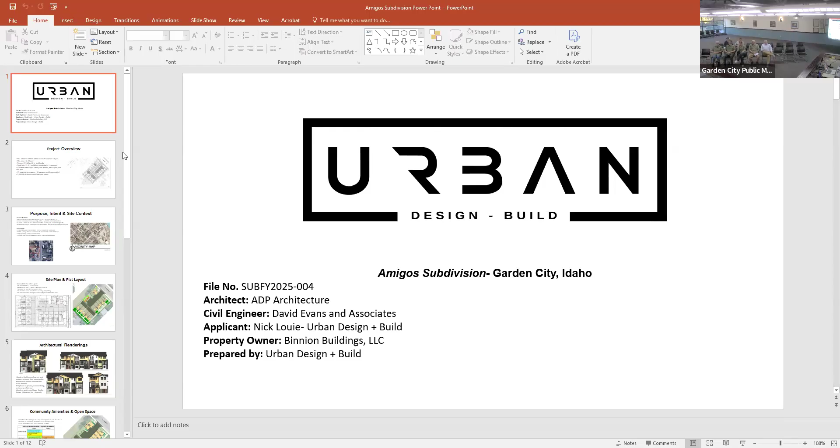To give you a little project overview, this site is located at 3933 and 3921 Adams Street in Garden City. It's plus or minus 0.56 acres of land in the R3 mixed-use residential zoning. We are proposing a 12-lot subdivision, with 11 buildable lots and one common lot. The subdivision will consist of one single-family home, one duplex, one triplex, and one fiveplex. We are proposing 27 total parking spaces, 22 of those interior garage parking and 5 guest stall parking. We are also proposing 3,200 square feet of shared qualified open space throughout the project.

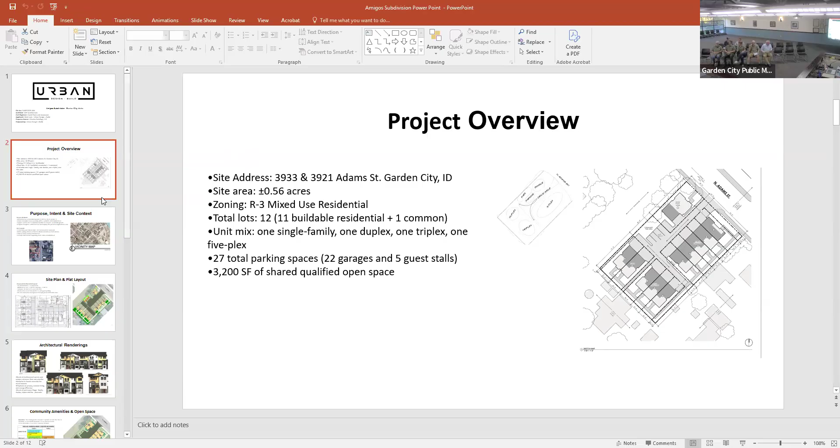So the purpose of this development, we're hoping to redevelop two underutilized parcels located at 3921 and 3933 North Adams. When I became part of the project, it was completely cleared, but I believe there were some old houses or mobile homes on the site at one point. Currently the site's completely clear.

We hope to create attainable home ownership within a walkable infilled neighborhood. By doing a mix of unit types, we can sell to several different classes, hence why we're doing townhomes and single family throughout the project. We hope to support Garden City's comprehensive plan for compact, sustainable growth, and we want to integrate thoughtful architecture and landscaping that preserves neighborhood scale.

The site is located between Chinden Boulevard and the Boise River Greenbelt, right off of Adams. It's walking distance to Veterans Memorial Park and local services and gas stations, really close to the Greenbelt. It's fully served by existing infrastructure on Adams Street, and it's a strategic infill location supporting smart urban redevelopment.

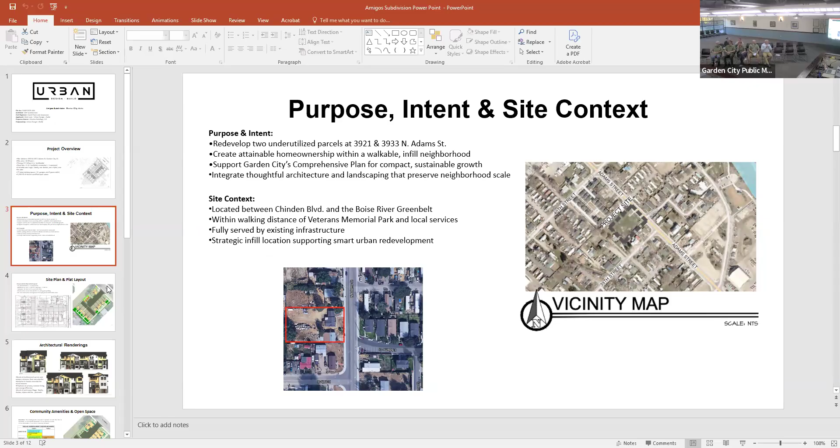I want to share with you the site plan, which is the first sheet I gave you. To recap, it consists of 11 residential lots and 1 common lot. The minimum lot size on our site is 1,350 square feet, and the average lot size is 2,030 square feet. We're abiding by all the setbacks with 20 front, 15 rear, and a 0 to 5 foot side.

We are proposing a private access drive coming off of Adams Street, going into guest parking, and we have a hammerhead for fire turnaround. We are going to contain all the stormwater on site with our stormwater management system and infiltration basins.

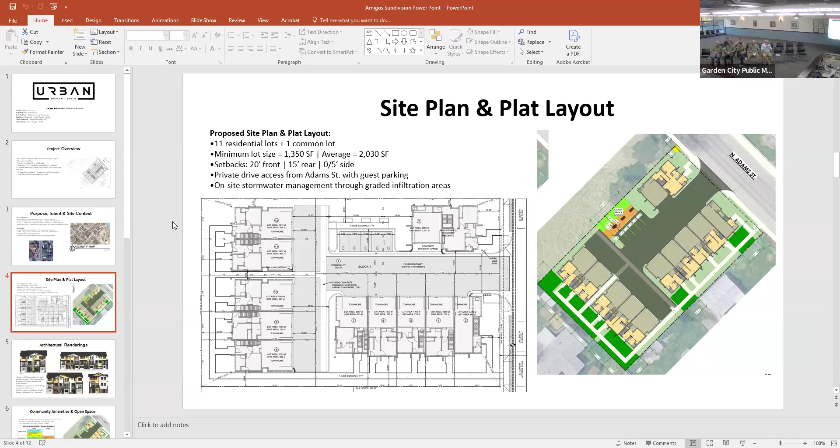So what we did is we changed the colors of the garage doors and front doors for each unit so people could distinguish one from the other. So we now have a blend of architecture, variety, and unique entrances from one another. We have variation in facade materials for visual interest, and we have an emphasis on privacy and outdoor living, and each unit is energy efficient.

We do have a blend of unit types - single family, duplex, triplex, and fiveplex. During our DR meeting, they really encouraged us to look into the code and figure out how not only can we have different unit types, but how we can distinguish them from each other. As a team, we thought different colors throughout, and that's something we wanted to discuss with you guys. We're open to changing colors, but we're willing to work with staff and do whatever it needs to meet code if we didn't already.

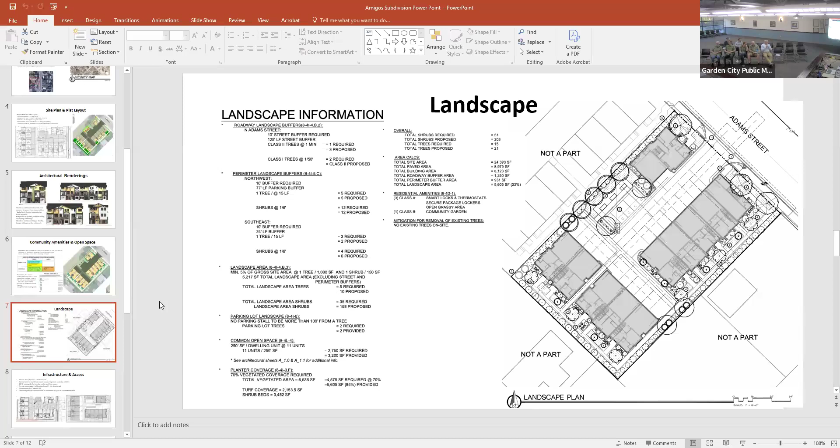Okay, so infrastructure and access: this would be a private drive entered off of North Adams Street, on the south side of Adams Street. We would connect to all municipal water, sewer, irrigation, and dry utilities. We would build the streets to ACHD standards with a turning radius for fire access, or a hammerhead. We met with the fire department and they approved the plan.

We are proposing on-site stormwater infiltration systems, so seepage beds. A small portion of the site, at the bottom here, is in the floodplain. We're advised to build everything above the base flood elevation, which we're proposing to do at 2 feet above BFE, to eliminate insurance issues and any risk in the future.

We are providing pedestrian circulation to all the amenities. That was a recommendation from DR last week. So we added sidewalks throughout the asphalt to get to the community garden and the mailboxes, creating a 360 rotation around the site.

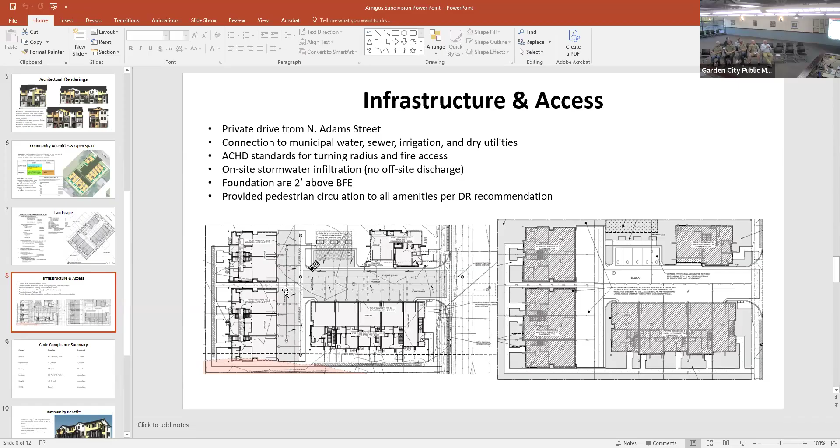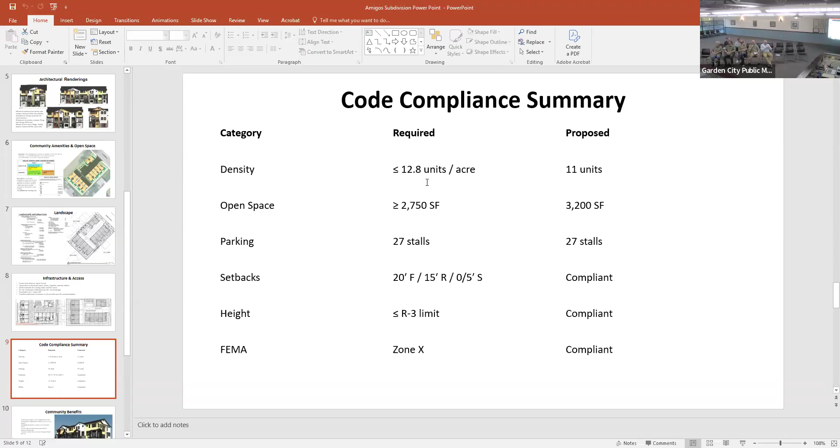To go over the code compliance summary: we comply with all density requirements, proposing 11 units where the site can support 12.8. The minimum open space needed was 2,750 square feet and we're proposing 3,200. We are required to have 27 parking stalls and we're proposing 27. We are compliant with all setbacks, height restrictions, and the floodway or flood zone requirements.

For community benefits: this is an infill project that aligns with the comprehensive plan of Garden City. We believe it will strengthen the neighborhood and diversify housing options and affordability. It's in walkable proximity to services and the Greenbelt, has great streetscape and landscape improvements to enhance the public realm, and expands Garden City's tax base through efficient land use.

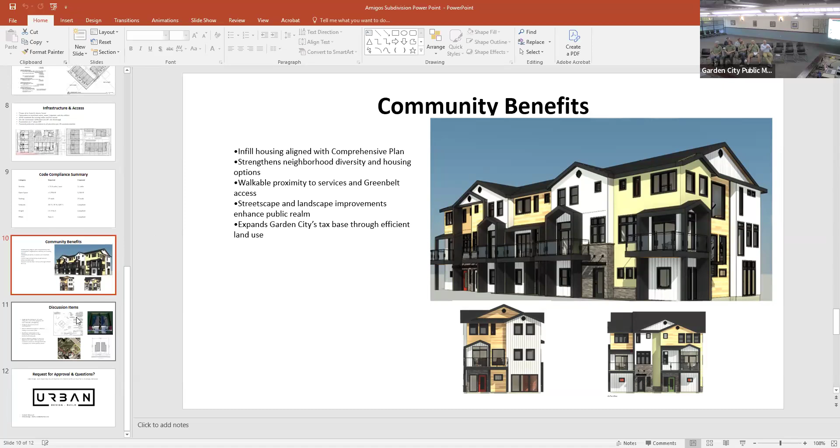One item for discussion, which was in the staff report and part of Hannah's recommendation for approval, is an easement along the south side of the property. The comprehensive plan shows a public easement and walkway, 12 feet wide, on the south side of the property, where this red marker is — a public access easement 12 feet wide along the south, with a 10-foot sidewalk and lighting. The purpose of this easement and walkway is to connect to future developments to the south, east, and west of our development. We had a couple of issues with that and wanted to discuss it with planning and zoning and staff to figure out how to work around this and find a happy medium for everybody.

So we did our due diligence and reached out to the property owner to the east, Damon Dickson, and he had put in a proposal, which are these two houses here.

This is kind of his site plan. He owns these two parcels. He has a project to the east that has an approved lot split for two single family houses. So he has two lots and plans on building two single family houses on those lots.

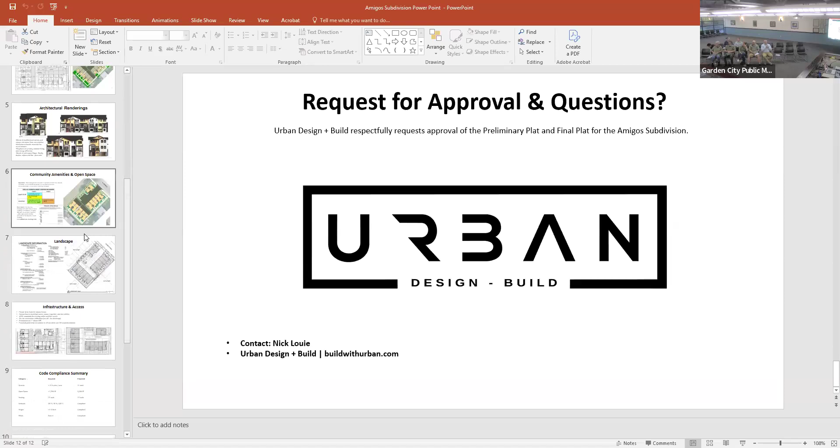Good evening, Chairman and Commissioners. The applicant did a great job summarizing the whole project. I do want to clarify and reiterate that this subdivision and PUD is no longer a PUD, and therefore any of the code waivers mentioned in the staff report are completely voided. I was not able to fully get around to the analysis of the October 6th and 9th resubmittals, but at a quick glance, it does appear like code compliance is being met.

But just in case, I did draft conditions of approval in the decision document to ensure that code compliance is met. With that being said, it is completely within the commission's ability to continue this application to the November hearing to double check and make sure the analysis is correct. That's not what I'm recommending, but it is an option for you to make, because a complete staff report is important.

There are a few items within the staff report that weren't really hit tonight as in depth as I would like to present to you guys. They're mostly interpretation and discussion items.

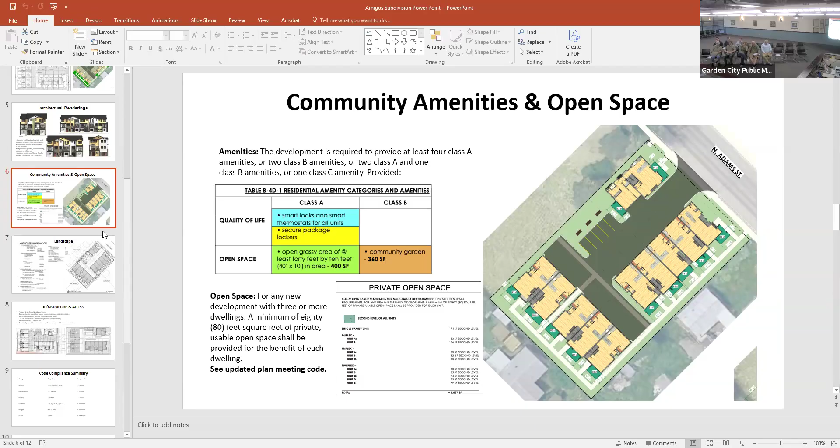Okay, the next item for discussion is the design of the facades. This is generally a design review comment, but given that it's new code, I wanted to bring it to your attention. The code now requires each unit to have some uniqueness, whether through architectural variety, colors, or materials, so people can differentiate between dwelling units. It does allow for paint colors to be different, and I'm not saying what the applicant has proposed isn't adequate. I just wanted to make sure we had this discussion tonight, or it can be sent up to City Council. There's a condition drafted to require coordination with staff, and if not, it can go back to design review for further deliberations.

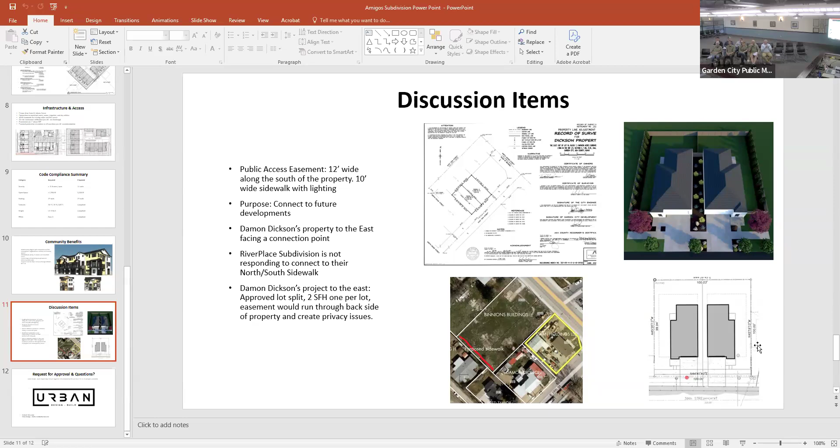The largest piece of discussion would be pedestrian connectivity throughout the site, specifically the southern pathway discussion. Along the southern portion of the property, there's a called-out pathway system that runs east to west throughout the city as a long-range plan to get more pedestrian facilities through these large, long blocks.

This particular pathway system does not exist. The way we've required of previous developments is to have that easement in place, and sometimes the construction is either required now or in the future. In the case of RiverPlace, the adjacent development, they had this east-west connection as well as a north-south connection. The city only required the north-south connection because other adjacent parcels have already been constructed to have this pathway, so it seemed like a more realistic immediate pathway connection, as opposed to requiring both out of the RiverPlace subdivision.

So not requiring the RiverPlace subdivision to construct this east-west pathway essentially dead-ends this Amigos subdivision right at the shared property line. The only way we could get a future connection through there is if RiverPlace was willing to construct a connection through their property, which we cannot require as part of this application.

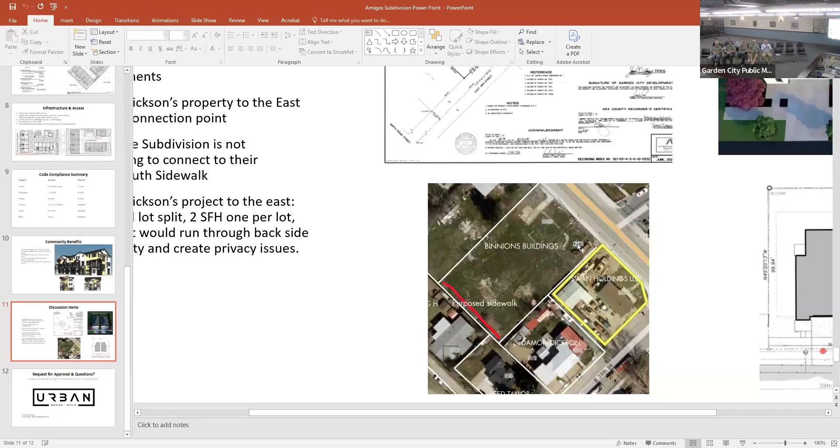All right, now we will open it up to public testimony. Is there anyone here that has provided a sign-in sheet? Chairman, there are no sign-in sheets in the basket. Is there anybody in the audience who would like to testify on this matter? All right, seeing none, then we will go back to the applicant for your rebuttal.

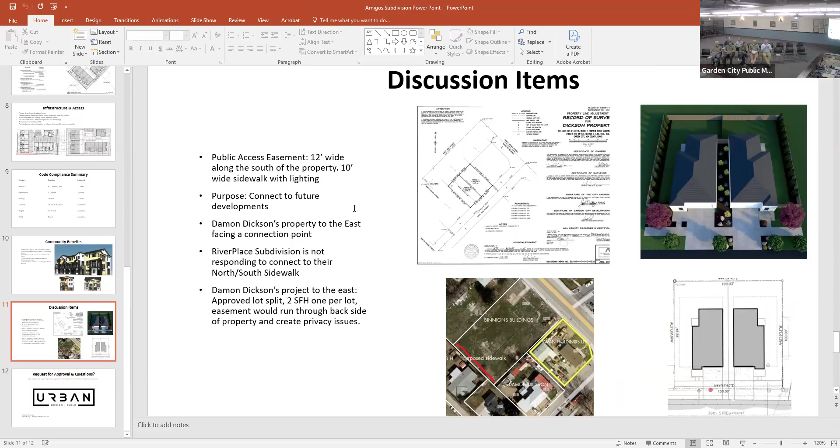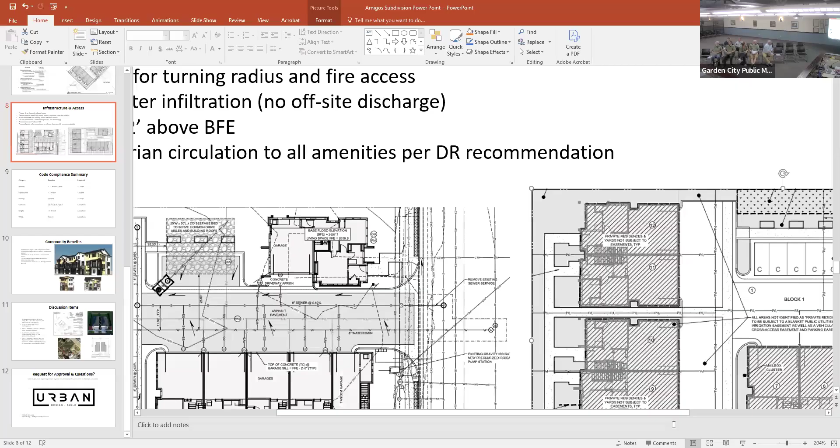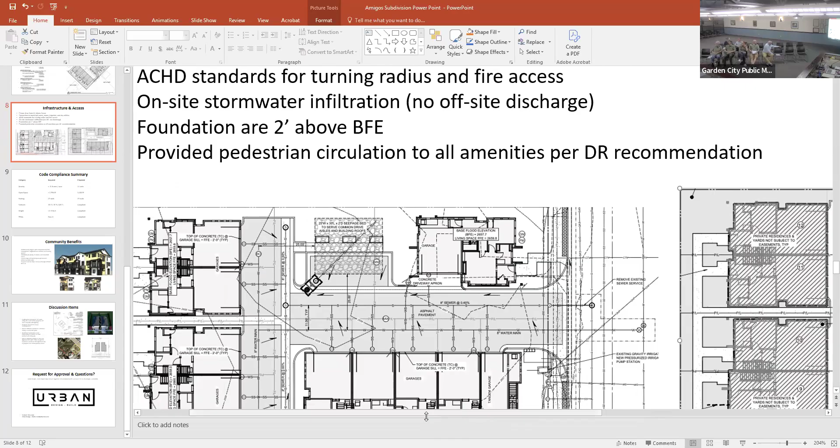I'll kind of point out that seepage bed for you. I can zoom in. So the storm water drainage system's right here, and we have a seepage bed underneath this parking lot and the garden beds here. That will take all the water from the asphalt, and then obviously along Adams, they have their own drainage system. Does that answer? You're welcome.

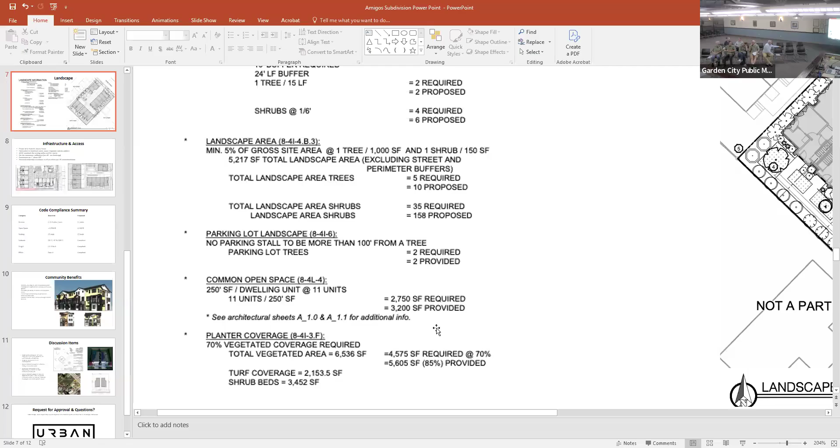Yeah, in all, we think it's a great project. We've worked the past 7-8 months on it. Good team, a lot of redesigns with a lot of guidance from Hannah. She's been great to work with. We think we've tweaked as many things as possible. There's just a couple of things in question as a group and internally we think would look better and we'd prefer. But we want to meet code, right?

So we like, as our team, we want consistency throughout the subdivision. We don't like the idea of several different colored doors, kind of making it look like a circus or something like that. But hey, we're open to it. We think it would look better if everything was consistent and congruent throughout the neighborhood. As well as, we also think it would look better without the pathway, because in our opinion it's going to be a 10-foot pathway along the south of our subdivision that's hardly going to get used, and we'd rather have landscaping and trees and make it look beautiful. We just think it'll be more private for the owners that own those units. So we hope you guys like the project, and I'm here for any questions.

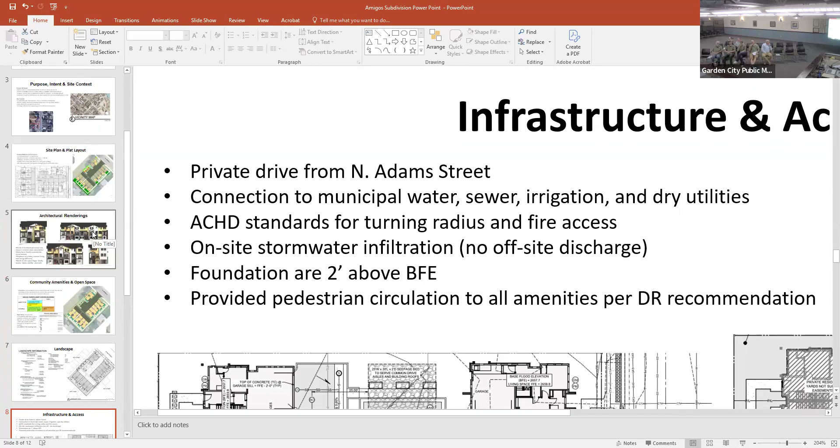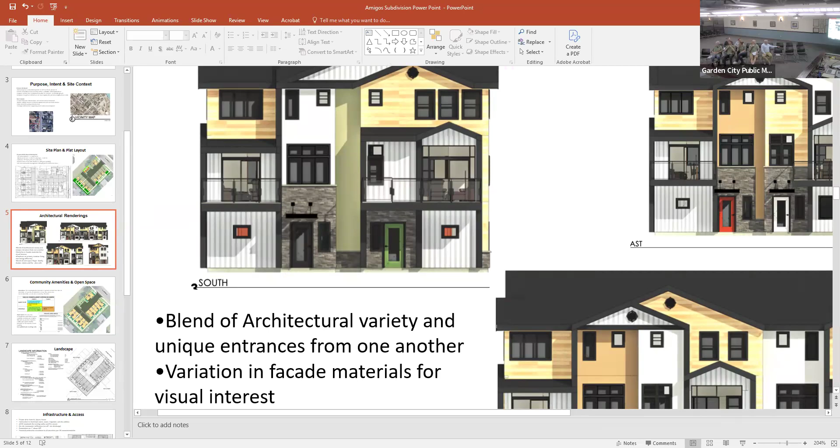Thank you very much. Do you have one of your slides? Can you show some renderings just so that we have a better idea of what you're talking about, on sheet A1.4? Yeah, so I just did snippets. So, are you talking about the colors of the building? I think that works. And maybe if you could give us a bit of a narrative on how you see the individualized - with what you're doing here, how would you frame it that this is more individualized? Yeah, let me zoom out. So what we did is originally all our units were the same design, same colors.

And then we met with DR about a little less than a week ago. And although we have different individual unit types, meaning single family, duplex, triplex, fiveplex, the code reads they want distinction between each unit within that building. And within that code, it says you can have different variation in color. So it was brought up as a recommendation to maybe potentially change the door colors to each unit, which we did. We changed the stucco colors between the units. So the fiveplex has a different stucco color than the duplex and triplex. And we also changed the garage doors, which you can't see on this slide, but I think in your guys' packet you might have some photos of it.

I will say, the garage door color that's shown in what you guys have is going to be changed. I did mention that to Hannah today, because it's not our favorite. Is that the green? Yes. Yeah, so don't hold that against us. Ideally we would like to have more consistency and continuity in colors throughout the subdivision, but we're trying to meet code. At the end of the day, we want to get this project approved, and we'll do what it takes. Thank you. Any other questions for the applicant? I don't think I would. No.

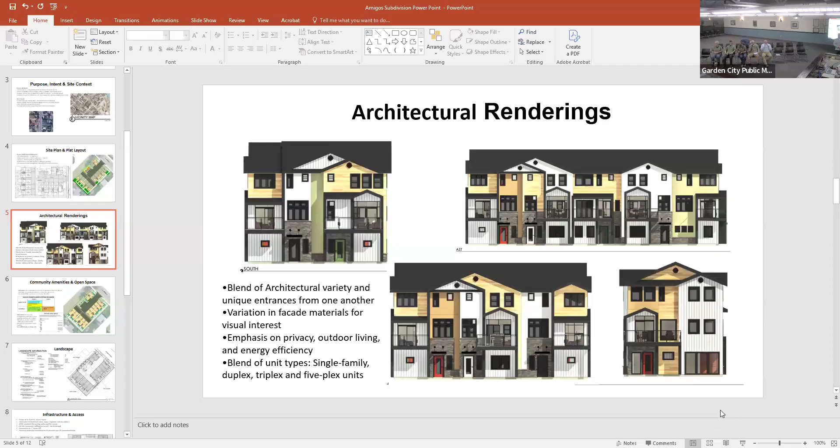All right, we will now move on the agenda to item C, which is CUP FY 2025-0013, for conditional use permit. Tyler Messina is requesting a conditional use for a reptile zoo, comparable to GCC designated uses of animal care facility and commercial entertainment facility, located at 3725 West Chinden Boulevard, Ada County, in the C1 Highway Commercial Zoning District. The applicant may go to the podium and state your name and address for the record. The floor is yours.

My name is Tyler Messina. I'm lucky enough to be the director and president of the Idaho Reptile Zoo. We're looking to get our CUP for our new facility on Chinden Boulevard.